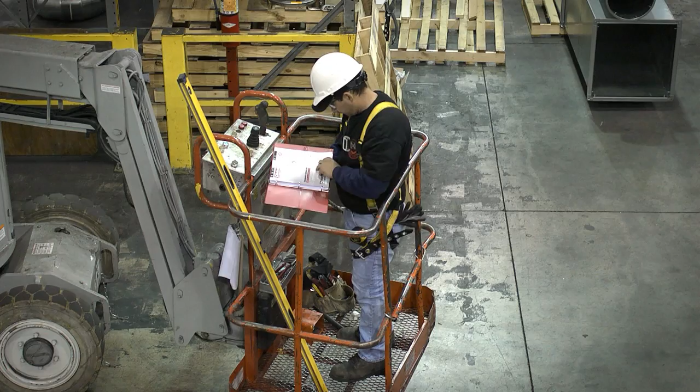Once the appropriate hanging configuration has been determined for the required application, installation may begin. In systems that do not require any additional lateral support, the single-point saddle configuration is ideal. This configuration may be used with any diameter of duct. You will need one upper attachment point, two clutchers, and one piece of steel cable for each hanger.

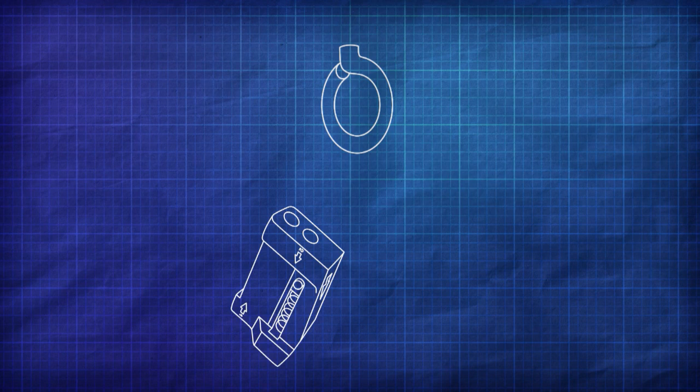To install the first clutcher to the upper attachment, run the steel cable through the free bore, through the attachment point, then down through the locking bore. Before moving on, check that the wedge is fully engaged. When trimming the steel cable, be sure that at least 3 inches of cable extends from the locking bore.

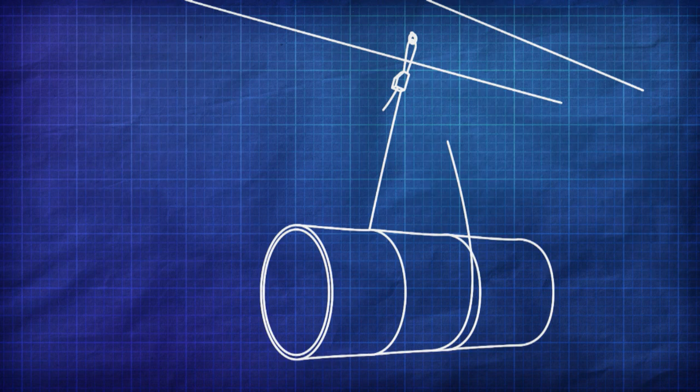Loop the steel cable around the duct, ensuring that the two sides remain parallel with each other and perpendicular to the ground. Repeat the attachment process with the same upper attachment point to complete the first hanger. Continue this process throughout the duct system, while checking that the load is evenly distributed between each hanger. Failure to do so can drastically overload a single clutcher, possibly causing it to fail.

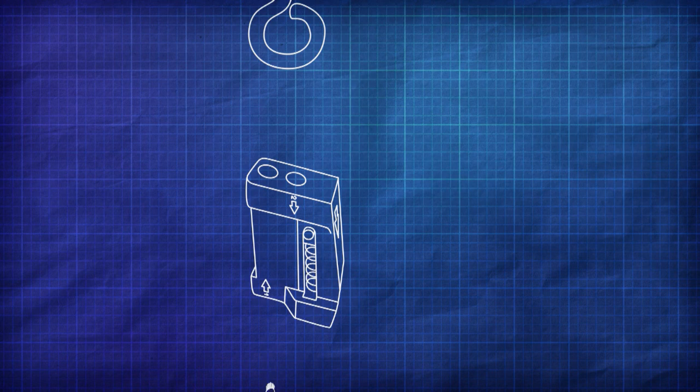Use the standard horseshoe method when stability is not a major concern. You will need 2 upper attachment points, 2 clutchers, and 1 piece of steel cable for each hanger. When installing the first clutcher to the first upper attachment, run the steel cable through the free bore, through the attachment point, then down through the locking bore.

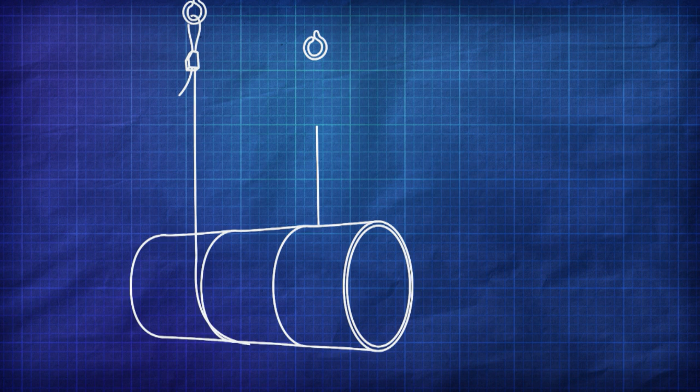Before moving on, check that the wedge is fully engaged. Trim the steel cable so that at least 3 inches of cable extends from the locking bore. Loop the steel cable around the duct, ensuring the two sides remain parallel with each other and perpendicular to the ground. Repeat the process with a second upper attachment to complete the first hanger. Continue this procedure throughout the duct system, while checking that the load is evenly distributed between each hanger.

The spread horseshoe method is the same as the standard horseshoe method, except that the attachment points are equally spaced away from the duct, up to 60 degrees from vertical. The clutcher system should never be used in a configuration which exceeds 60 degrees from vertical.

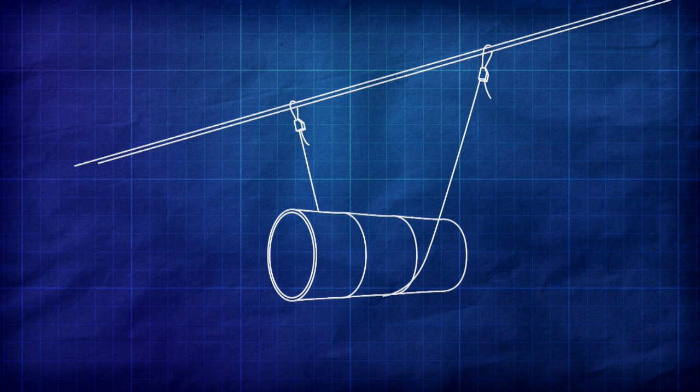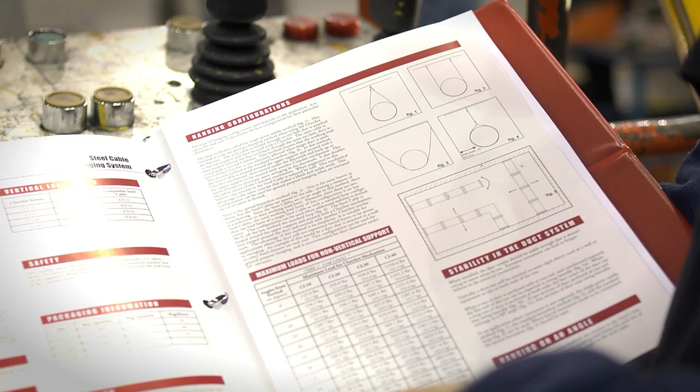This spacing creates more stability and is recommended when installing a duct system that requires the maximum amount of lateral support. Keep in mind that by spacing the attachment points, you are reducing the maximum load limit of each hanger. Refer to the clutcher specification sheet for details on maximum loads on non-vertical supports.

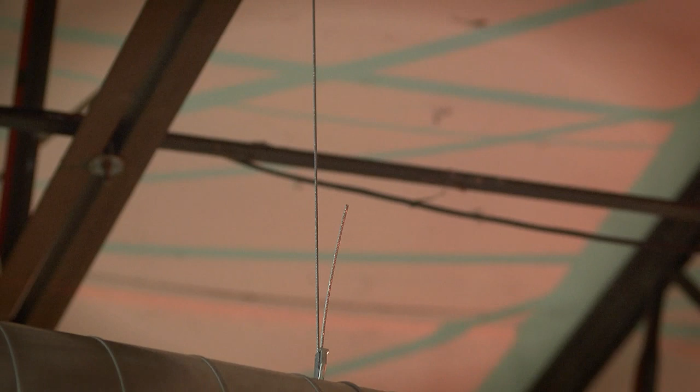When hanging ductwork up to and including 18 inches in diameter that does not require lateral support, the standard loop method is a simple solution. Just as when using the single-point saddle method, you will need 1 upper attachment point, 2 clutchers, and 1 piece of steel cable for each hanger.

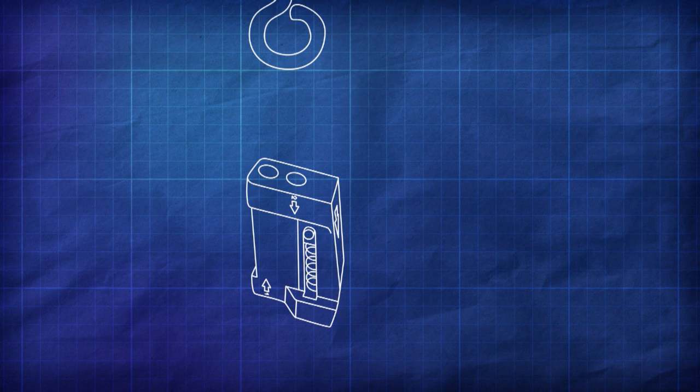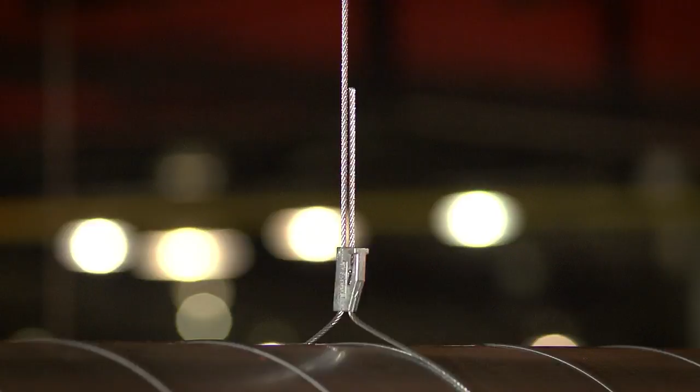Install the top clutcher to the upper attachment. Run the steel cable through the free bore, through the attachment point, then down through the locking bore. At every step, always make certain that the wedge is fully engaged. Trim the steel cable and be sure that at least 3 inches extends from the locking bore.

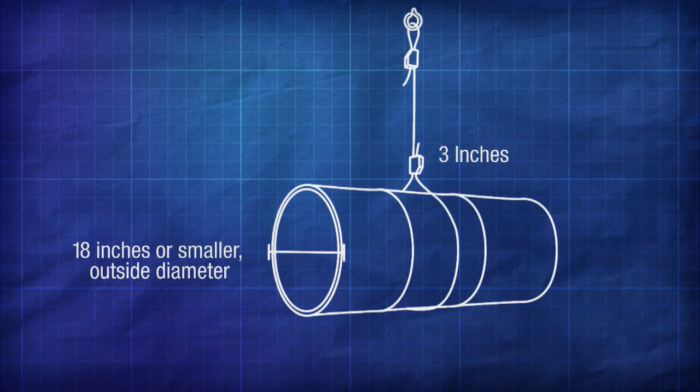Run the steel cable through the free bore of the bottom clutcher, then loop the steel cable around the duct. And complete the hanger by running the steel cable through the locking bore of the bottom clutcher. Once again, leave at least 3 inches after trimming. Repeat this process throughout the duct system, checking that the load is evenly distributed between each hanger.

Never use the system for lifting or oscillating loads. The clutcher system should only be used with static loads. Each clutcher is manufactured with a 5-to-1 safety factor, designed to protect the system against a temporary increase in weight load. However, before making any adjustments after the clutcher system has been installed, be sure that the load is supported by other means.

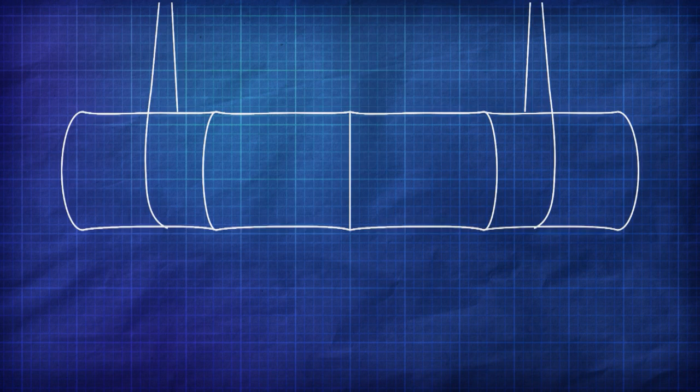After the clutcher system is installed, paint or any other substances that could affect the mechanism should not be applied. After all other trades have completed their work, a final inspection of the duct system and hanging configuration should be conducted by the installing contractor to verify that the integrity of the system has not been compromised.

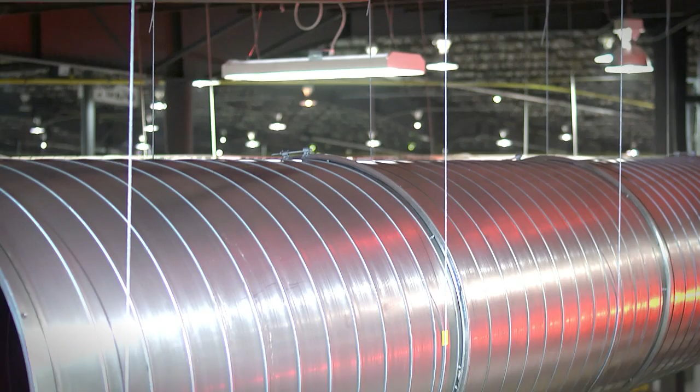Whether you're using the single-point saddle method, the standard loop method, the standard horseshoe method, or the spread horseshoe method, Ductmate's clutcher system offers the versatility, ease of use, and the reliability you need.